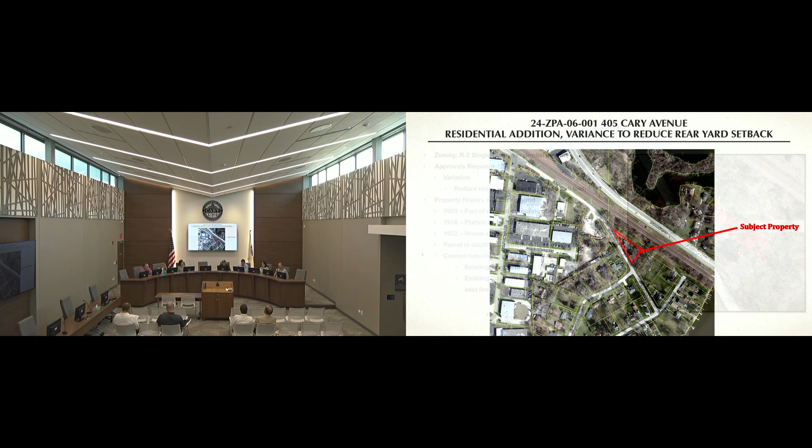Thank you, Mr. Chairman. The request this evening before the board is related to a proposed addition that the Reeses are looking to put onto their existing single-family home at 405 Cary Avenue. They're seeking a variance for a rear yard setback for the proposed structure. This slide summarizes the property. It's currently zoned R2 single-family residential. They're seeking a variance to reduce the rear yard setback from code, which is 40 feet, to a 0-foot setback line.

Some history for the property: it was part of the original corporate limits of the village from 1893. It was originally platted as part of the Jandus Fox River Addition subdivision in 1914, and the original home was constructed on the property back in 1932. The subject property actually fronts 3 right-of-ways, with Cary Avenue being the one that is actually developed with a roadway. The rear of the property is dedicated right-of-way for Jandus Road, and there's also right-of-way to the east of the property toward the river for an adjacent street that terminates at the intersection with Cary Avenue. That creates a bit of a unique configuration with this property.

It's a triangular-shaped lot, which currently is non-conforming in a few areas. Specifically, it does not comply with the front setback requirement. Code requires 30 feet; the home is currently set back 8 feet from the front property line. The triangular shape of the property also means there's no western property line, so there's a lot depth of 0 feet on the west line and about 124 feet on the eastern line, when code requires a minimum of 125 feet.

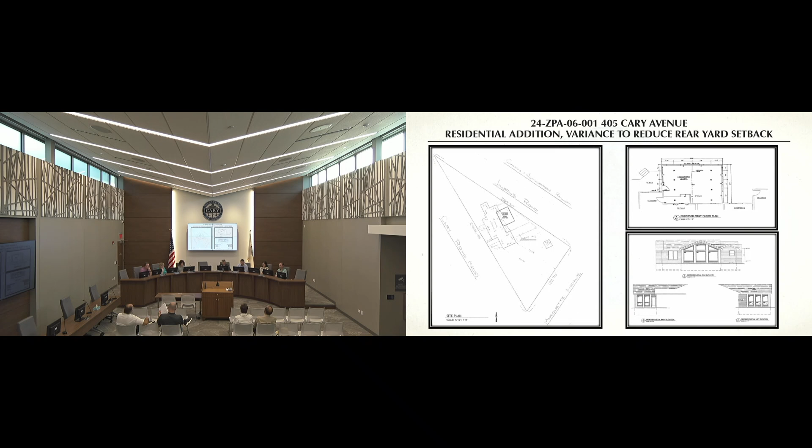So the petition, as staff provided the report, was for a setback of 0 feet. The petitioner did provide some documentation that approximately would be about 3 feet off the property line. But the rear property line in this area is adjacent to a right-of-way not being utilized for roadway surface. In this image, you can see that right-of-way is about 40 feet in width, adjacent to another right-of-way for the railroad tracks, the Northwest Union Pacific Northwest line. So there is no additional structure behind this property, where that right-of-way acts as a de facto rear yard for the subject home.

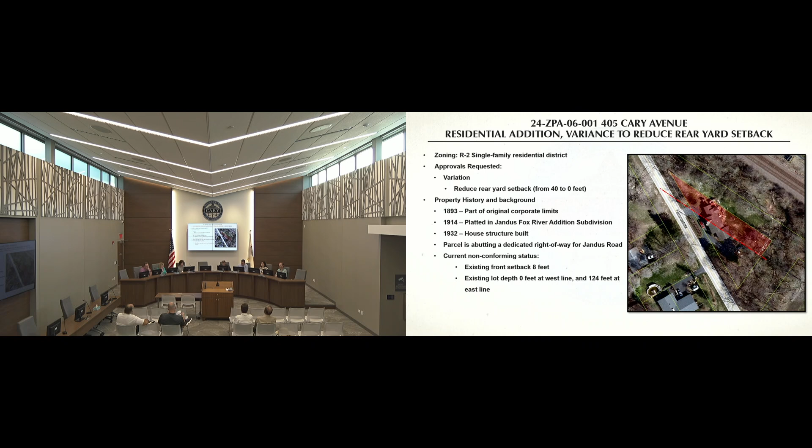Within the Unified Development Ordinance, there are various standards established that need to be justified for support of a variance. In this case, the hardship was caused by unique circumstances relating to the land, not the general conditions of the district. The property cannot yield a reasonable return if permitted to be used only under the standards set out in the title, and the applicant has not taken any action that has caused the extraordinary condition to be substantially worse than it otherwise might have been.

Based on the unique configuration of this lot, staff believes there are hardships in place from the standpoint of the existing nonconformity status as far as the shape of the lot, and the presence of the right-of-ways adjacent to the property. The proposed relief being sought this evening would not significantly or negatively impact any adjacent properties, as it's adjacent to right-of-way and the railroad tracks on the northern edge of the property. So in that regard, staff believes the proposed variance does comply with the standards within the ordinance.

Should the ZPA agree with that determination and find that the various standards have been met in this case, staff recommends that the ZPA approve a variation to reduce the required rear yard setback for a one-story addition from 40 feet to 0 feet for the property located at 405 Cary Avenue, subject to the one condition in the staff report that the proposed improvements substantially conform to the plans and exhibits submitted as part of the petition.

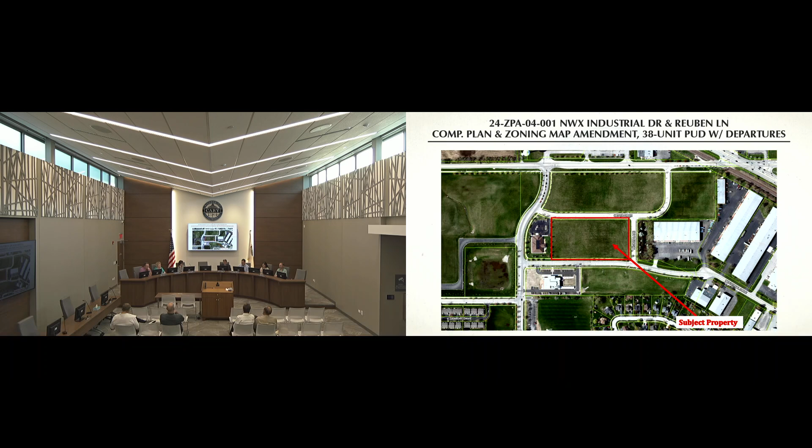Thank you, Mr. Chairman. The request this evening for this case is seeking development approval for a project on the property across the street from the Municipal Center here. It's seeking approval of a comprehensive plan amendment and a zoning map amendment, and also PUD approval for a 38-unit residential project. Currently, the subject property is zoned B3, our fringe business district.

As mentioned, the petitioner is seeking approval for various elements related to the project. The comprehensive plan amendment would change the designation for the property, the future land use map, from industry and employment to single-family attached. Related to the project, they're seeking to rezone the property from the B3 designation to our R3 multifamily residential district, which would allow for single-family attached housing.

With the property being over 2 acres in size, and also having multiple units, it does require PUD approval, which would necessitate the process this evening. And there are various zoning departures related to the project as planned, which the petitioner is seeking approval of as part of that PUD approval.

Specifically, they're seeking departures for the building setbacks along Kaper Drive and Reuben Lane, to reduce those required setbacks from 30 feet to 25 feet. The setback along Industrial Drive would be a reduction from 30 feet to 15 feet. An additional departure requested is the side-to-side separation between structures, where code requires a minimum setback of 15 feet, and they're seeking to reduce that to 10 feet.

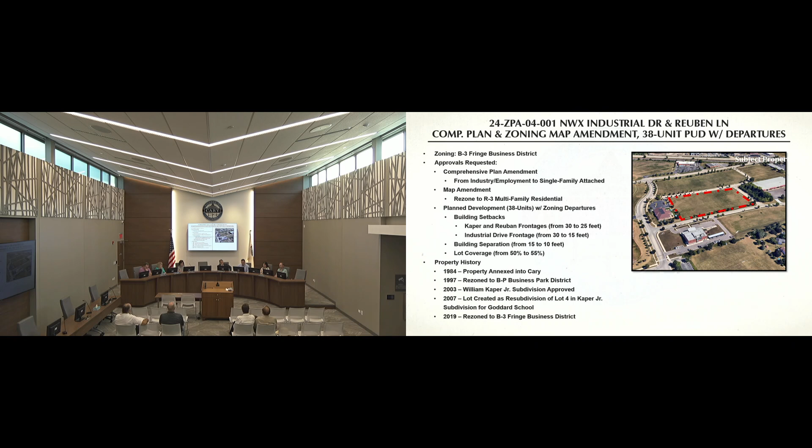Just an overview for the public: from a plan development standpoint, Chapter 7 of the Unified Development Ordinance establishes regulations for plan developments. Specifically, it's a way to encourage more flexibility in design for projects without the rigidness of standard zoning regulations.

So it does allow for more unique design and character, potentially to preserve natural open features and open space, building structures and design for specific properties. It's required for any project that is non-single family detached on a property over 2 acres in size. This property is about 4.5 acres, so it's required to go through and receive PUD approval for any development. But also for any properties zoned B1 or B3R would also have to go through and receive approval as a PUD for proposed modifications to a plan.

As a summary of the proposal, the petitioner is seeking to construct a 38-unit single-family attached development. The project would include a mixture of both duplex and triplex buildings, each 2 stories in height. The roadway configuration, the interior of the site, would remain private and owned and maintained by an association, with most of the units having access to that interior roadway portion.

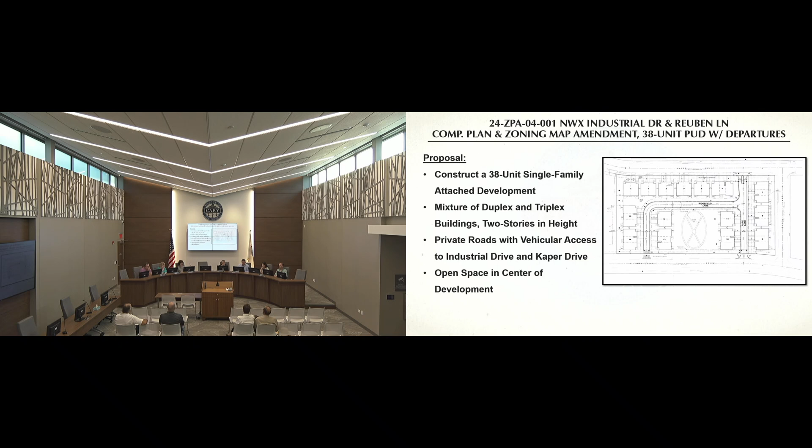The comprehensive plan designation for the property currently is industry and employment, designed for encouragement of more industrial growth or business parks. The proposal would change the designation to single-family attached, aligned with the proposed project. Within the comprehensive plan, there is various guidance, as indicated in the staff report, for encouraging additional residential growth within the community, specifically looking at more single-family detached housing, potentially in the periphery of the village, but also looking for ways interior to the core of the village, encouraging more single-family attached product similar to what is here.

Also, the plan does provide guidance as far as looking for new housing opportunities that can provide for young professionals, small families, and seniors, and gives guidance as far as locations to be considered that would have a presence to pedestrian access to community amenities, transit, goods and services. This property has close access to the current municipal center, but also Kaper Park, which is just to the south of this facility.

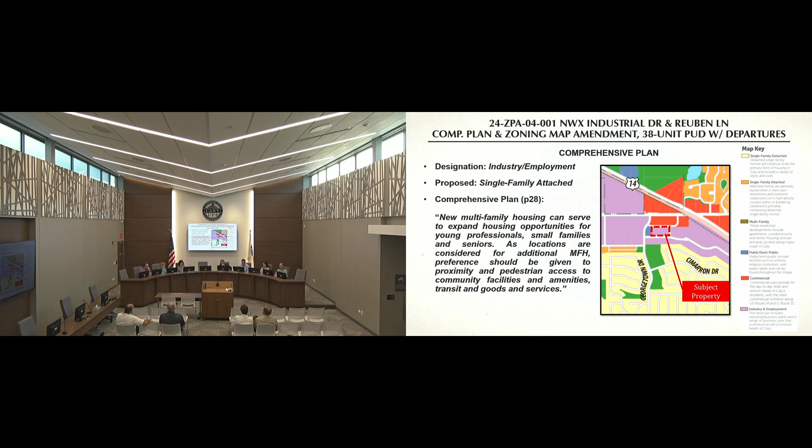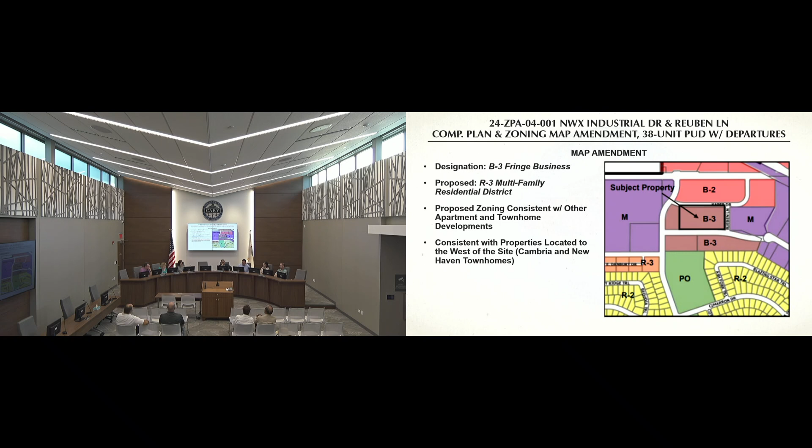With the proposed site, the petitioner is seeking to rezone the property from its current B3 designation to accommodate a single-family attached product. It would rezone to the R3 multifamily residential district with also the PUD designation. The proposed zoning would be consistent with other apartment and townhome projects within the village, and also two that are in relatively close proximity of the facility along New Haven Drive, the Cambria and New Haven townhome projects. So the proposed R3 zoning district would be consistent with those nearby projects.

As part of the PUD, there are various departures requested from the bulk regulations. The first is the building setback along Kaper and Reuben. As shown in the image, the proposed reduction would be to reduce the setback from 30 feet to 25 feet, to the side and front of the structures along Kaper, and then the rear of the structures along Reuben Lane.

There would be a patio constructed at grade level, extending 10 feet off the back of those structures along Reuben Lane. The building setback along Industrial would be for the side of units facing that roadway, proposed to be reduced from 30 feet to 15 feet, with additional right-of-way between that property line and the lane of travel.

The other setback separation requirement being sought is the side-to-side separation for multifamily structures or single-family attached structures. Within the code, there are regulations for how close buildings can be placed to each other. Specifically, side-to-side separation is 15 feet, whereas a front-to-side or rear-to-rear building elevation has different code requirements, typically 30 feet separation, but with side-to-side it can be reduced to 15 feet.

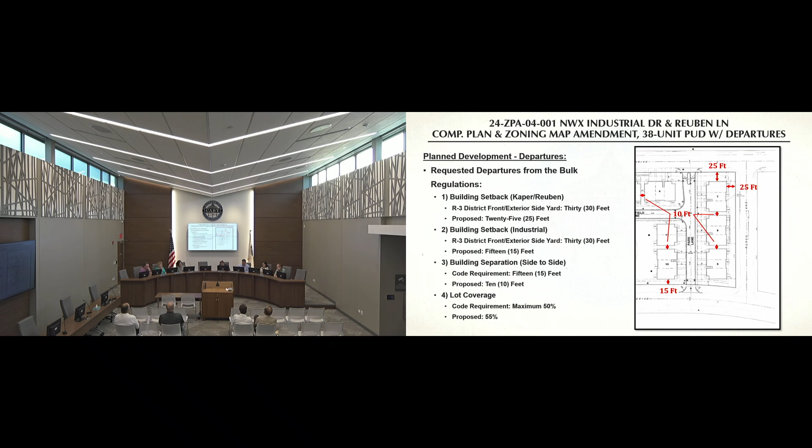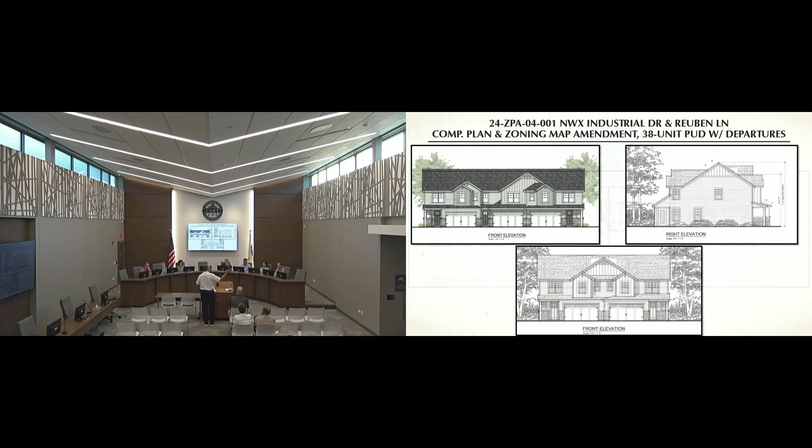So, thanks, Mr. Simmons, for doing a great job of covering the overall concept of the plan. As he indicated, a big challenge with the site is that it does have a 20-foot fall from as you walk outside, and you can see the western property line going down at the site. There's an overall 20-foot fall, which makes it very challenging from a development standpoint in particular.

Even with most business uses, commercial uses, they're all looking for a flat piece of ground. When we started site planning this, we went through probably 10, 12 different gyrations in terms of trying to figure out the best way to make this development work. Most townhouse builders build a 4-unit building, 2 end units, 2 middle units. As we laid out that type of concept, you would have a building that would be flat for 1 or 2 units, and then you'd be dropping down.

You'd see there's some other examples of it in town where they call it like a bench elevation, and they drop that elevation down 1 or 2 feet. It doesn't look good. The driveways usually have a big slope in between the units.

So we ultimately came up with this plan, which does a lot of different things. Number one, from a grading perspective, it helps out by taking care of having smaller units, the duplexes and the triplexes. It gives us the flexibility of being able to adjust the grading in between the units. What it also gave us was the ability to have a development of 38 units where 30 of them are end units.

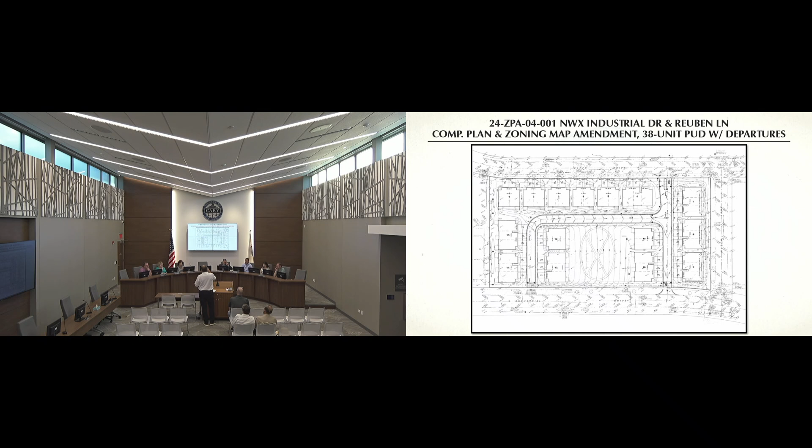We've been building here in town - we built 10 ranch homes over the last 3 years, and we're building townhomes on 2nd Street and 14 right now. We know there's a market for the empty nester who wants more of a maintenance-free, one-level living concept. So the end units of all these buildings have that plan with the master bedroom, or now called primary bedroom, down, where we can accommodate that buyer. We're hoping that will capture a big portion of that market, but just in case, we also created a plan with the primary bedroom on the 2nd floor, which also gives us the ability to have a covered porch on the 1st level.

Again, as Mr. Simmons pointed out, there will be a homeowner association. It'll take care of all the common areas. Each individual homeowner will own their own home fee simple, and the rest - snow removal, landscaping, maintenance - will all be taken care of by the homeowners association.

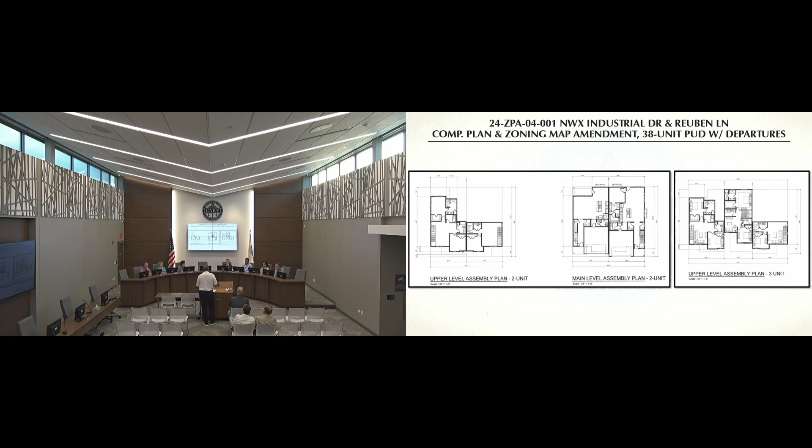Again, as discussed, landscape-wise we've created 2 nice entry monuments, which you can see in the center of that slide. There will be one on each corner of the entrance, coming in off of Kaper and coming in off Industrial Drive.

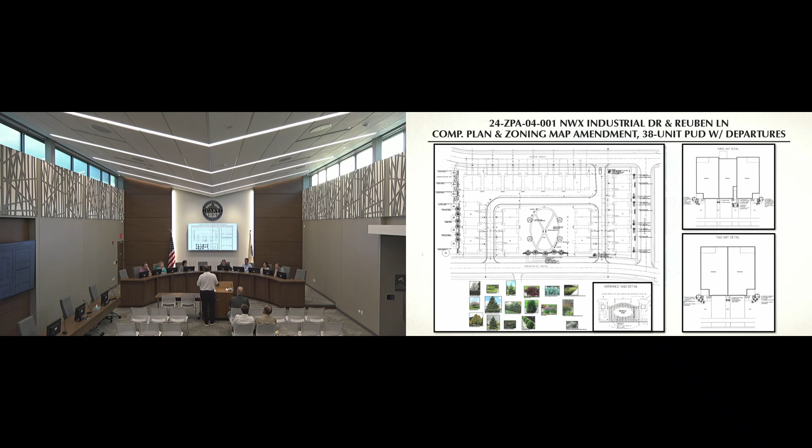Next to the Goddard School, we've filled in the areas where there's already an existing ornamental fence that provides security for the school, and they have some very large parkway-type trees already planted. We've taken those and are filling in with a lot of large evergreens in between to provide a nice screen between the properties, so our homeowners aren't looking at the people using the school and vice versa.

The big thing we've tried to create is that park site in the middle. It'll be an active park with a trail system running through it. There'll be some grade so people can still keep in shape. We plan to have dog cleanup stations there, as well as a couple of fake fire hydrants, so there's an opportunity for people to use that facility - a private park for the subdivision.

I don't know if you have any questions for me. Mike could answer any questions pertaining to grading, the overall engineering, stormwater management, anything else. Thank you, I appreciate it - it's a well-done project. So I'll ask members of the ZPA if they have questions.

Just looking at this, I like it. I like the layout, I think it fits in there really well, especially as a division between the Goddard School and the industrial area. That's nice, especially with it being the multi-family building, so that looks good. Especially that park area - that's a nice touch too. The only thing - I don't know how far you've gone on building plans - is the 10-foot separation between the buildings. Just make sure that with the code you don't need a fire rating on some of those exterior walls. I'm not sure how close it has to be before you need an hour rating, which could affect your windows and construction. You hate to have to go in there and start moving them around, so maybe before you get too far along, just confirm that.

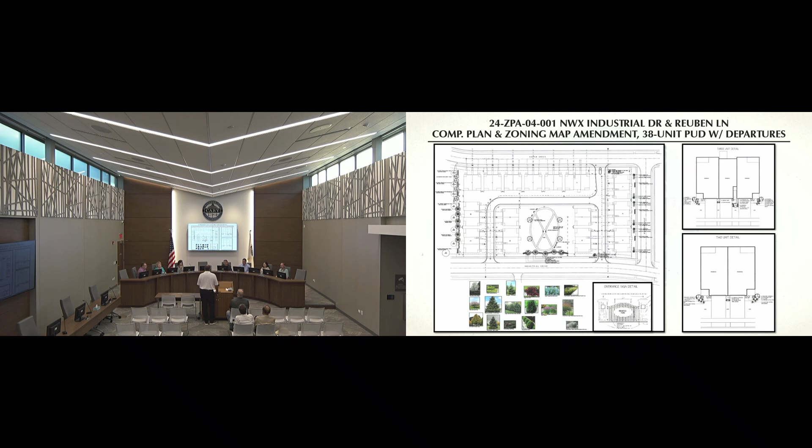Okay, well, thank you for that. And then my last question, Mr. Dula, is that, like I asked Mr. Simmons, I don't know if you received any feedback, because the application requires you to notice people within 250 feet. So I don't specifically know if anybody from the school, for example, has said, hey, what are you doing over there? No, nothing, we have not. We did provide all the notices, both the newspaper notice as well as the individual letters that we needed to send out, and we received no response.

Okay, well, thank you for that. So I don't have any additional questions. I want to check with the ZPA members if we have any additional questions. No? Okay, so thank you, Mr. Dula. Thank you.

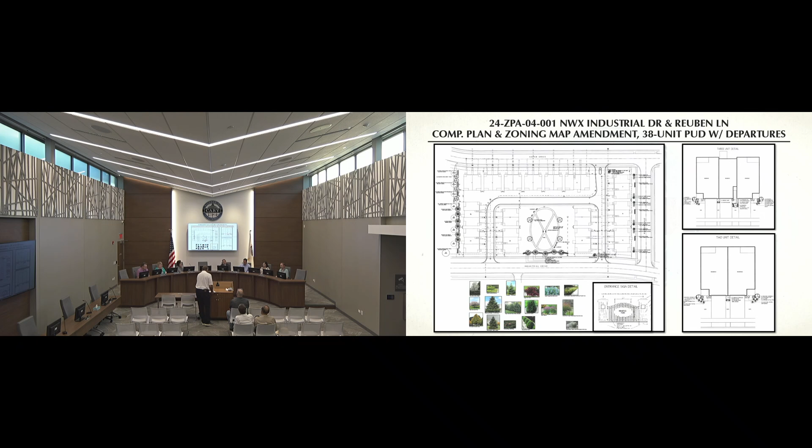Mr. Anderson, this is the time we will open it up for public comment. If anyone wants to offer public comment, remember just when you approach the podium, just say your name and address for the record. And hearing none, we'll close the public portion of the meeting.

So unless you folks have questions amongst yourself with the application, I'll probably call the motion. Yeah, okay. So this will be no glasses, this is a long motion.

So the chair will entertain a motion to recommend to the Village Board of Trustees: 1, approval of an amendment to the comprehensive plan future land use map from industrial/employment to single-family attached; 2, approval of a map amendment to rezone the property from B3 Fringe Business to R3 Multifamily Residential District; and 3, approval of the Richfield Park planned development located in the northwest corner of Industrial Drive and Reuben Lane, subject to the conditions listed in the staff report. On your podium you would have received attachments 1 through 10 now, so there's a couple of new ones that Mr. Simmons alluded to earlier. So that's the motion.

So moved. Second. Thank you, gentlemen. Mr. Simmons, would you call the roll? O'Laughlin, yes. Kretschmer, yes. Trandell, yes. Castetter, yes. Corey, yes.

So, Mr. Dula, you have a favorable recommendation. I know you've already presented to the village board, and you've done other projects around town, and they're very well done. But the process now is to go with Mr. Simmons to make sure everything's buttoned up for the next meeting. I'm assuming this will go forward for the same date. Correct, August 6th. Yeah, and we'll wish you every success with this project, just like you've done around town. I think the work you've done is stellar. So, well done, and we'll wish you continued success. Thank you, I appreciate it. You bet.